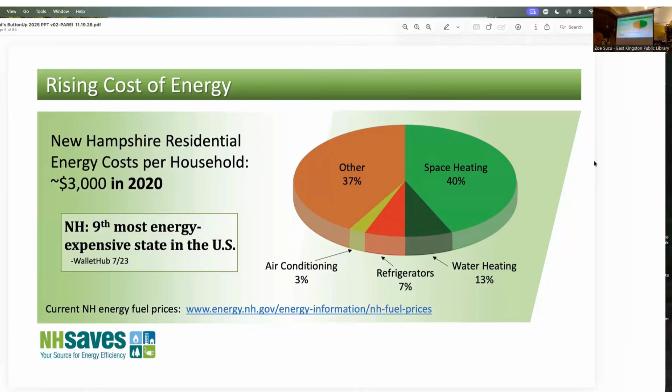We'll talk about electricity, because everyone's got an electric bill, unless you're off-grid or something. Most people just get their bill, grumble and moan, write the check or make the payment, and move on. But if you look at the bill, whether electronic or on paper, there's a little more information in there sometimes that you can look at - it might help you figure some things out.

There's usually a little graph that'll show you how you're doing month to month. I don't know if Unitil does this here, but some bills give you a little comparison to your neighbors - showing you how you're doing.

That thing is notoriously unreliable because they don't really know how many kids are in the house, how big or small the house is. They don't put that information in there. So sometimes that number, I wouldn't put too much credence in it.

But the average family or household uses about 20 kilowatt hours per day, which comes out to 600. It's helpful to know what's using the most energy in your house for electricity. If you have an electric water heater, that's going to be at the top for sure, that's the biggest thing. If you have some other way of making hot water, like propane or oil, then your refrigerator is probably the biggest one, which makes sense because A, it's big, and B, it's on all the time.

Your washer and dryer, and your entertainment center, you only use those a little bit each week. So no matter how efficient they are, they're not really going to make that much of a difference in your electric bill.

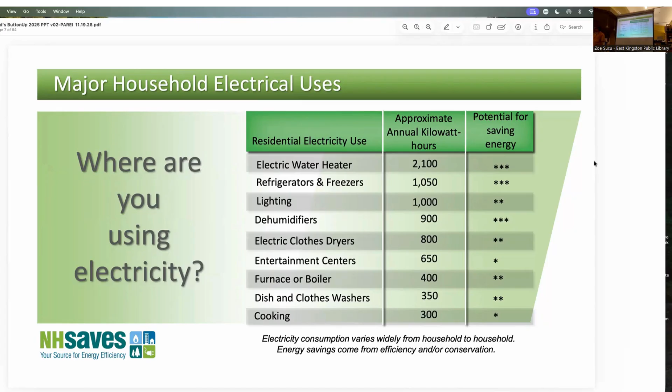If you're trying to figure out what something uses, the library here has a device called the Kill A Watt meter that you could borrow for a little while. You can take anything in your house, plug it in, do some math, and figure out like, oh, this TV or whatever costs me this much a month, whatever it is you want to figure out. You can figure out individual items, so that can be kind of helpful.

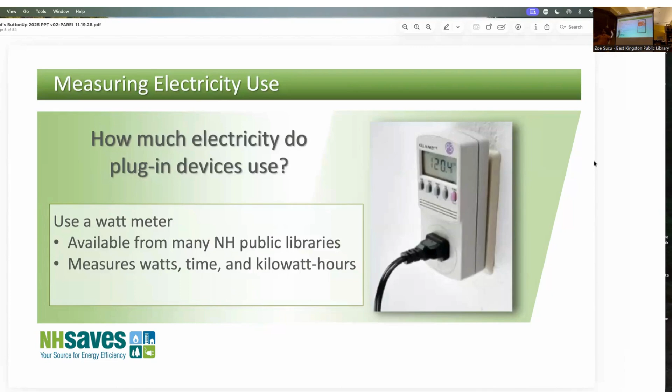You can take the next step, which is kind of a neat thing they've developed recently - whole house electric monitors. This would monitor every single thing in your house that's using electricity in real time. You could pull out your phone at work and say, oh look, my daughter just turned the microwave on and left the garage door open, and her light in her room she left on. You can see what's on and off, what's using power and how much. This can be really handy if you have a high electric bill but can't figure out what's going on.

There might be something hardwired in your house, like a well pump, that you can't plug into one of those little Kill A Watt meters. So this little device goes into your electric panel down in the basement, and it's smart enough to tell the difference between a vacuum cleaner, a TV, a hair dryer, a light, and things like that. It's kind of neat. Sometimes it has trouble figuring certain things out, and you can teach it - you can say, oh, that thing you think is a vacuum cleaner is actually the charger for the lawnmower, or whatever it is. You can actually label it and give it some names.

It says here electrician install - that's kind of a cover-your-own-behind thing I think we have on there. But technically speaking, I believe they're promoted and marketed towards homeowners to put in. You want to have a little bit of knowledge about electricity to do it, because you do have to open up your electric panel and do a little bit of work in there. They're a couple hundred dollars, but they can be really handy. There's a couple different brands - this screenshot here is from the one called Sense, that's one of the more popular ones that I've seen.

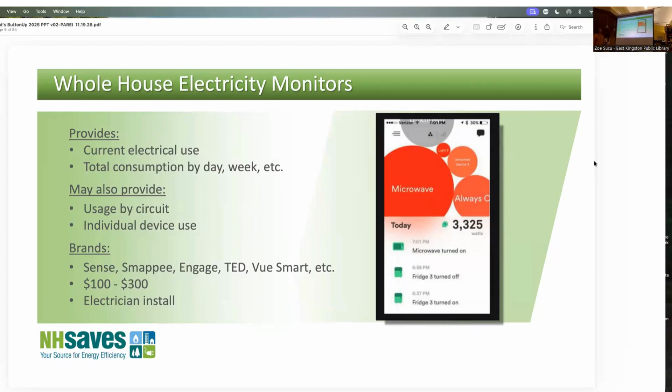This seems kind of stupid to put in a slideshow about saving energy, because everyone knows to turn things off when you're not using them. But you'd be surprised. Sometimes I'm getting hired by somebody to come to their house to do an energy audit to help them save on energy.

They go outside and they're weeding in the backyard or cutting the grass. And I'm going through the house and I hear something in a room, I knock, open it up, nobody's in there but the TV's on. Then I hear something else, open up, the stereo's on, or there's a space heater on. Then down in the basement there's a home gym, and there's a TV on down there. Wait a minute, we're trying to save energy but you got all this stuff on.

So I think over the years, a lot of us have developed some pretty bad habits. So there's some kind of behavioral modification that can happen sometimes to just help keep those things in control.

There are certain things in your house that are always using power. Anything with a black box, a charger, anything with a remote control like a TV, those are always using a little bit of electricity even when you're not using it. It's kind of tricky, because when I hit the off button on a TV, I think off means zero, but off doesn't mean zero. Off can mean like 20 or 30 watts. So for 22 and a half hours a day, that TV might be using 20 or 30 watts, just sitting there warmed up, ready for you to hit the remote control.

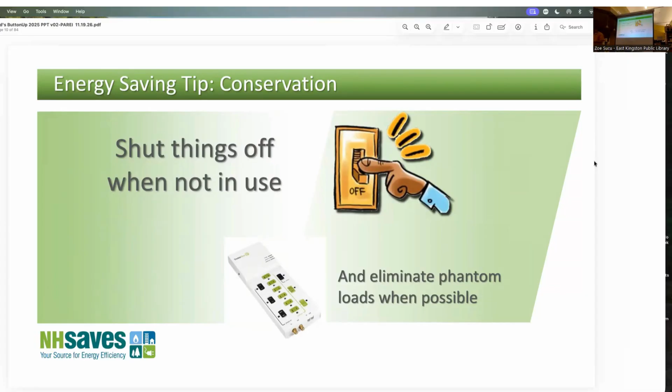As I mentioned, some of you guys might remember, these look like LEDs, but the lights they came up with years ago for energy efficiency were the CFL bulbs, the little swirly ones. They had mercury in them. They flickered. They took forever to come on full strength. They were terrible. I wish they never got invented, because they really gave a lot of people a bad feeling about energy efficiency lighting.

But LED bulbs now, like this one or the ones right here, don't have mercury in them. They come on right off the bat when you turn them on. They last a long time. They put out really good light, and they use a fraction of the energy that the bulb they're replacing usually uses.

Sometimes I'm in a house putting in, let's say somebody has 10 recessed lights in their kitchen. Each one of those old Edison style bulbs is about 75 or 100 watts, and I'm putting in a bulb that's only 9 or 10 watts. So all 10 of the new bulbs I put in don't even equal the energy of one of those bulbs I took out and threw in the trash. I wouldn't throw it in the trash if it was one of those CFL bulbs because that's mercury, so you got to recycle those.

The one thing I would caution you against is getting the ones labeled daylight. I know that sounds kind of weird because everyone loves daylight, right? Daylight's awesome, but the spectrum of light we call daylight in a room feels really kind of bluish. It feels like you're sitting in a dentist chair or something. So you really want one that is more like warm white or soft white, they call it. If you want to get scientific, look at the Kelvin number—something like 2,700 or 3,000, but not the ones that are like 5,000. That's what they call daylight.

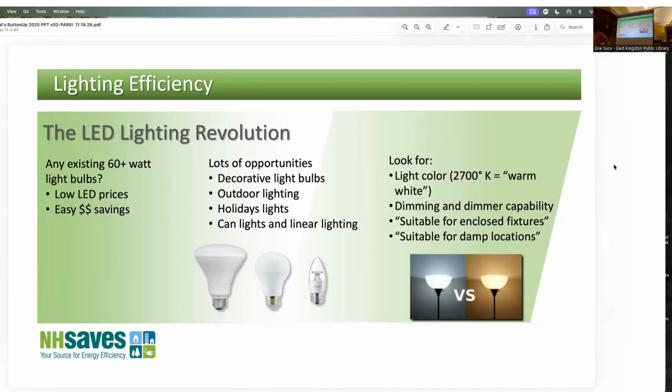I mean, they really have figured out all the things that people didn't like about the CFL bulbs, and they figured out how to make it better so people have nothing to complain about. They also last a long, long time for the most part. I've heard some stories from some people with some brands where they're having some issues with them, but for the most part, they do last a long time.

Again, another really easy thing you can do is throw in a low flow shower head. Some people worry that it's going to be just a little dribble of water coming out. Most people that I work with, when we put these in, they're like, wow, that thing is awesome. It feels like there's more water coming out now than there was before, because it's coming out at a higher pressure. So it usually isn't a big deal to have a low flow shower head, and every time you take a shower, you're going to be saving energy.

This pipe wrap you can get at the hardware store. It's really cheap, really easy to put on. So if you have exposed pipes in your basement, or up in a knee wall space or something, you can insulate them. That's a really cost-effective, good do-it-yourself kind of thing.

Turning down your hot water is a good one for a lot of people. It doesn't need to be like 150 degrees, where it's steaming. That's a scalding risk, it's really dangerous, and it's a waste of energy. So 120 is really all you need.

And the last thing you can do is be like me and wash all your clothes in cold water. This shirt is like 20-something years old, and I don't think it's ever been in hot or warm water. I have some clothes that I do wash in warm water, like if I'm out in the yard getting dirty, I kind of have to use a hot water cycle. But I found that most of my clothes come out fine just washing them with cold water. You don't really need the hot water.

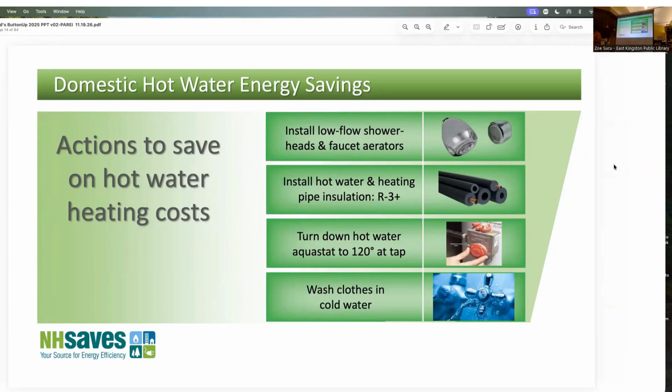Again, other simple things: you can make sure your dehumidifier is a good one, a modern one, not from like 1972. Make sure it's set at a good humidity that you want.

I think you can still dry your clothes outside in Kingston. Is that true? They haven't passed a law yet or anything, right? Because I did one of these over in Hampton, I think, last fall, and there was a gentleman who came up from Massachusetts to the thing. He said, 'Yeah, my town in Massachusetts just passed a law that says you can't have a clothesline.' He said so all the townspeople are up in arms and they're all going to fight it. I've heard that there are some condos that do that too, condos that have a rule against clotheslines. But that's free energy from the sun.

So we're certainly not going to tell you to go out and get rid of all your appliances and go get Energy Star appliances, because that would be pretty bad for the planet if we all did that. But if you do have something like a washer or dryer that's getting near the end of its life, or if it dies, that's when you should look for that Energy Star label, because that will save you some money in the long run.

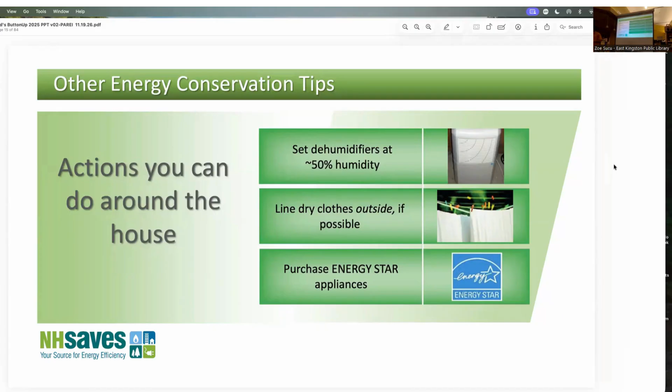They've got a lot of different rebates for Energy Star. You can get them for washers and dryers, and even little room purifiers and stuff now. The most popular one is the refrigerator one, because refrigerators use a lot of energy, and they're kind of hard to get rid of sometimes. Sometimes the transfer stations won't even take them, or they charge you. So in this program, they'll actually sometimes take your old one away for free. So that's something you can look into.

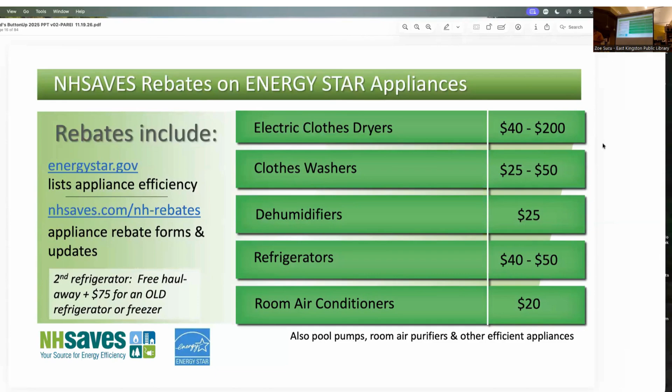All right, let's move on from electricity to staying warm in your home, because that's kind of what we've all been doing for the last 4 or 5 months. Probably got another month to go of doing that. Maybe even more, but it's going to be like last year.

So again, starting with the real basic things, what can you do to save energy on your heat? First of all, you could turn your heat down when you're not in the house for an extended period of time, 4, 5, 6, 7, 8 hours. If you're just going down to the store to get some milk, don't bother turning your heat down, it's not going to do anything, it doesn't make sense. But if you have a propane or oil system and you're going to bed or going to work for 8 hours, it will definitely save you money to turn it down, whatever, 3, 4, 5, 10 degrees, whatever you can get away with.

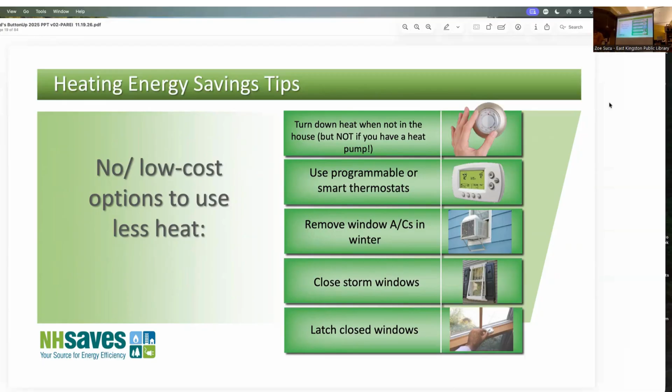All right, we'll get into some deeper things now. You might think back to some stuff you learned in a physics class somewhere along the line, but hot always goes to cold. That's one of the basic laws of physics. It always goes to the coldest thing it can go to.

We cannot stop it. All we can do is slow it down as best we can. We haven't figured out a way of actually stopping that kind of heat loss. So when you turned your heat on in September or October, you've been heating it all winter long. The house is warmer than the outside, so heat is always trying to escape, going toward the cold. If it's a hot day, like a 90-degree day, this won't be happening. But if it's anything colder than your house, that's the direction the heat's going to go in. So it's kind of important to remember.

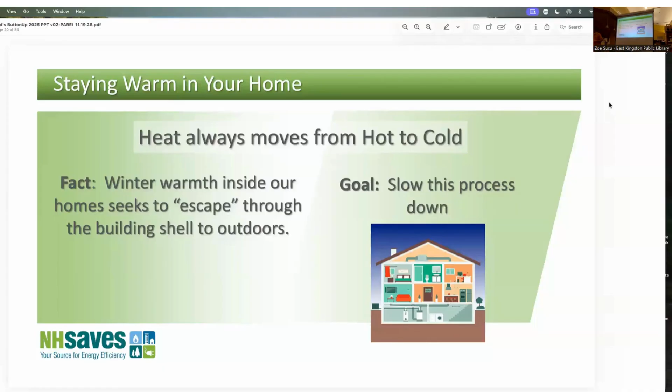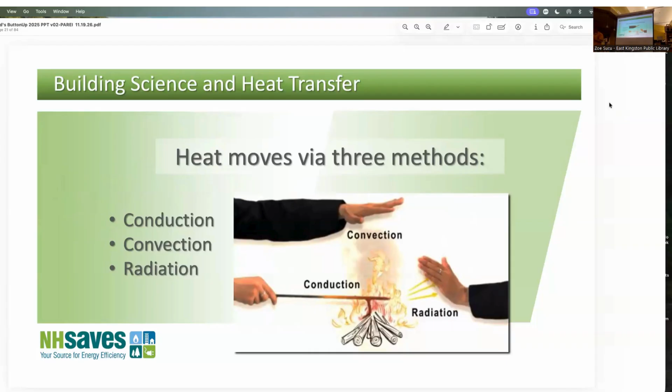You might remember these words from a science class - this is the way that heat moves: conduction, convection, radiation. There's a few other more obscure ones which we won't even mention. We're really not going to talk about radiation at all either. We're going to talk about the other two, because those are the ones in a building that actually really kind of drive your bills up.

So the first one is conduction, and conduction is when heat goes through a solid surface. This person here is going to wish they had a glove on in a second, because they're holding like a metal poker into a fire. The heat is going to go right through that metal into their hand, and they're going to drop it.

So we know certain things are not very good at conducting heat, and we call those insulation or insulators, and that's a good thing. There are some applications, like in a computer system or a spaceship or a car, where you might want something that's a really good conductor and sends heat very quickly. But in our houses, we want things that don't transfer heat very quickly. That's what we're looking for.

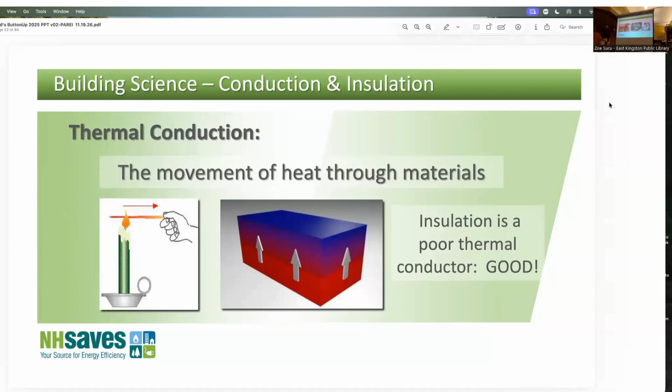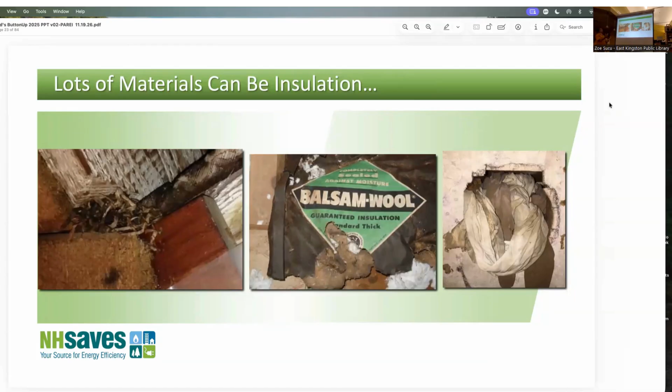So obviously this stuff, not a very modern thing and not very good. Oh, here's another wild one I saw recently - bedspreads and comforters and chaise lounge cushions and stuff. I suppose it's helping a little bit, but the mice certainly loved it. This lady swore that it wasn't hers, and I believe her because she had just bought the house a few years before that, so they've been there for a long time. She didn't know those were up there. I went up there and took some pictures, and I came out. She's like, 'How's it look up there?' I'm like, let me show you.

You're not going to believe this.

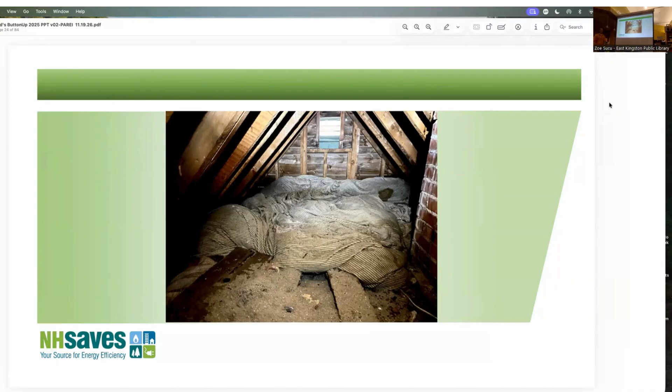So yeah, we don't want to use stuff like that. We have a lot of different things we use when we insulate houses. We rate these materials with what's called R value - the higher the R value, the better. That's how good the material is at slowing down heat flow. One of the more famous ones you probably see around is fiberglass. This happens to be pink fiberglass, but it comes in other colors, and that's about 3.5 per inch.

So depending on how thick it was, that would be your R value. Another product that gets used a lot is blown cellulose, which is this right here. I got it in a bag just because it makes a mess. It's kind of light and fluffy. It's actually made out of recycled newsprint and newspapers and things like that. If you look closely at it, you can actually see some glitter sometimes. Really, really good product - it's got about the same R value as fiberglass, but it has a bunch of other really good qualities that fiberglass doesn't have. So this is actually, I think, in most ways, much better.

And then you get into some things that have more R value, like this rigid foam board here. This has an R value of like 6 or 7 per inch, and this is 2 inches thick, so that would be about 12.

Similar product to this would be spray foam. This comes in a 4x8 sheet, and you cut it up and put it in places. Spray foam actually comes out of like a truck with big barrels of chemicals, and they put it together and spray it on the wall, and then it puffs out. It's got this texture to it. That has a really good R value too, like R6 or R7. It's also a lot more expensive though, so it's not like this is better than that stuff just because it's got a higher R value. There's a certain time and place where you might want to use some of these materials.

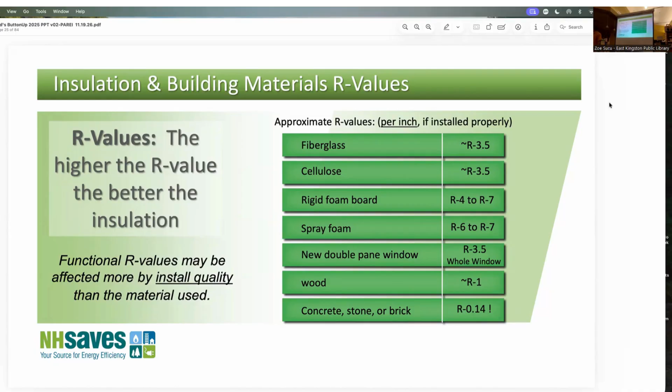In terms of R values and what the building code says, the average house in New Hampshire is kind of over here.

The average attic is supposed to be R10 to R30, but I was in a house in Newfields last week that was R1. It had drywall or plaster and lath, so I give that a little bit of credit, but above that there was no insulation at all, none, which brings the average down quite a bit to about R1.

By code in New Hampshire, at least on paper, if you go to this website it tells you what R values you're supposed to have in your attic, walls, and basement. So the average house in New Hampshire is not even close to where it should be, and I'm talking about older houses, but also newer houses, and in some cases even new houses.

The New Hampshire energy code, when were those numbers put in? We're kind of behind. Some states say they'll adopt the next energy or building code whenever it comes out, and they change it about every 3 years. In New Hampshire, we're hesitant to automatically follow what other states are doing, so we're typically at least 5 or 6 years behind. Last time I checked, I think we may still be following the 2018 building code, maybe 2021, and it's already '26, so we're like 4 or 5 years behind. We also don't adopt everything in the new building code - we pick and choose what we want to follow and make exceptions for certain things.

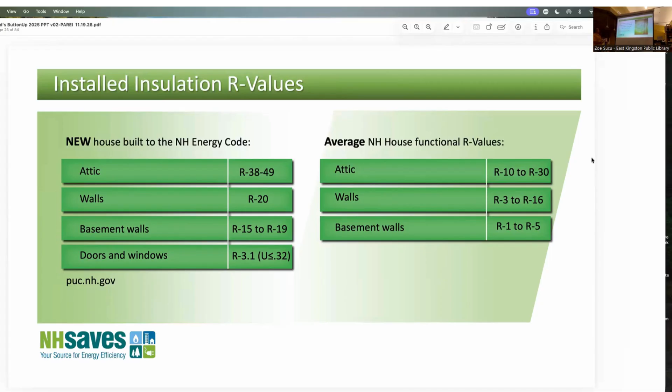Install quality matters. This is a picture of an attic with R38 insulation, which is a good level - not quite up to code, but a lot better than most houses. But you can see spots here where there's exposed wood, bare drywall, bare sheetrock. When you figure out the average R value of that attic, it's actually down to like R15 or 20, not 38. So even though it says R38 on the back of the insulation, the heat loss coming from these gaps is so rapid that it works against what the rest of the insulation is trying to do. Install quality is really, really important.

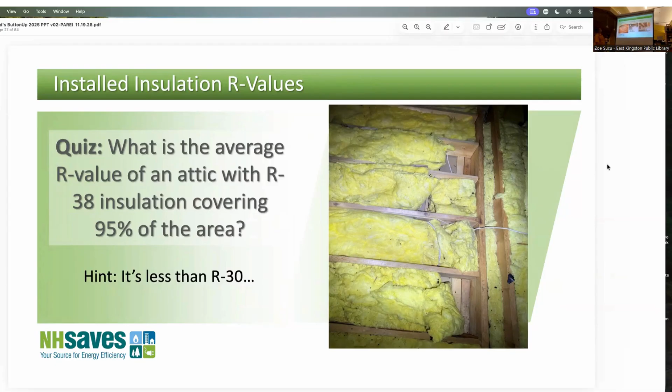There are a lot of different ways insulation can get messed up. First, you could just not have enough of it. This is blown fiberglass - these look like 2x6 joists sticking up 2 or 3 inches, meaning there's only 2 or 3 inches of insulation, when the tops of these floor joists should really be buried in about a foot of insulation. Sometimes you have spots that are really high and spots that are really low - there's a lot of variation - and sometimes you just have missing insulation entirely.

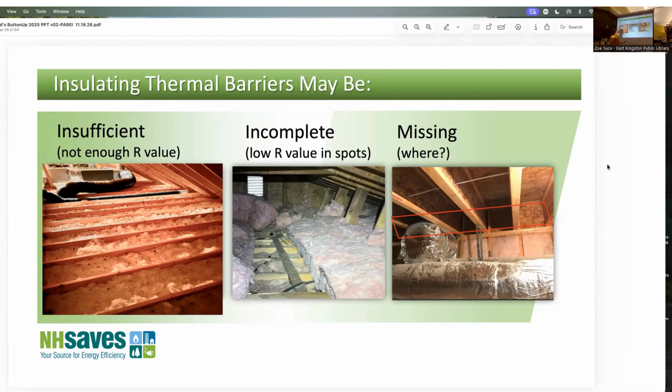This was the back of a wall at a place I was looking at in Nashua - a really ultra-modern new building. For some reason, when they built it they put this pre-painted insulation in the wall, but they didn't realize that behind this section was actually the outdoors, not the living room. So they needed insulation there, but it had none. You can only see 3 or 4 bays here, but this went on for about 50 feet - an area probably 2 feet high by 50 feet long with no insulation at all. The heat loss in that little strip was phenomenal. At that point, who cares what's in the rest of the wall - if you have empty spots, it doesn't really do anything.

A little bit less common, but still out there a lot—I saw it a couple times this week—is what we call misaligned insulation. That means the insulation is not lined up right, it's not in the right place.

This is a situation where somebody decided, instead of insulating the floor of their attic, to insulate the slopes, the slanted part. Sometimes that's actually a good idea, but not in this situation because there's daylight coming through there, there's a fan, it's open to the outdoors. It's like insulating these walls really well, then leaving the windows open all winter—it doesn't really do much. This is kind of like having a window open, right?

I mentioned people kicking the roll of fiberglass. This is somebody where it goes up and down, and underneath there's some wood, so there's a big cold spot underneath because there's all this space under there. This is not really going to work very well right here.

This is a situation where I went up through this little hatch and looked around in the attic, and there's insulation in the slope, which means I am technically inside the house—it's cold on the other side of that slope and it should be warm where I am. But then I turn around and there's insulation in the walls too, facing the bedrooms. So it's like, you don't want it in both places—it needs to be one place or the other, not both. Somebody just was confused about this when they put it in, and you could tell it was probably two different people at two different times. They just didn't really get the whole concept of having one good thermal barrier.

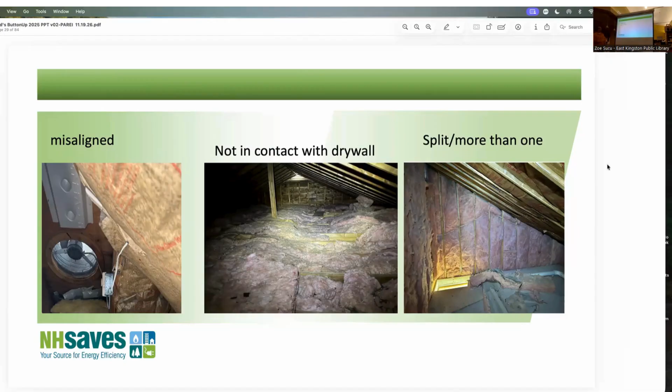All right, so that's conduction. Let's move on to convection and ask this question: heat rises—how many people have heard that before? Guess what? It's not true. It's false. Heat does not rise.

Where does heat go? We just talked about it—it goes to cold, right? So it doesn't matter if the cold is up, down, left, right, north, south, diagonal, whatever. Heat is always going to go through whatever solid surface it needs to get to the cold thing. It's a little bit of a trick question because there are situations where it appears heat is rising, but the heat is actually not rising. What you're looking at is the hot air, and the hot air rises—that's a little bit different. It sounds like I'm splitting hairs and being a little silly with it, but it actually does make a difference.

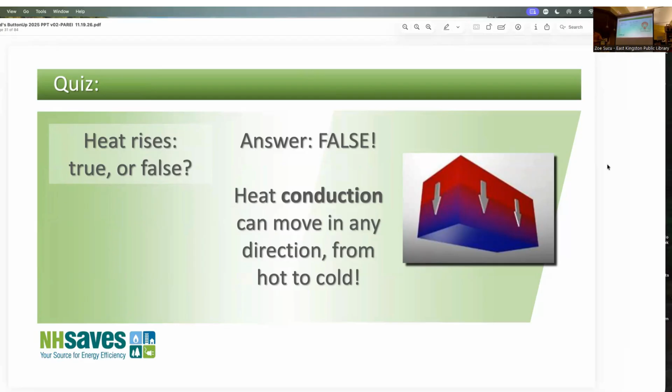That's the reason why hot air balloons work, right? In a hot air balloon, they have a big gas thing that fires up and makes a bunch of heat, and the heat makes the air hot, and hot air does rise. So the hot air rises up and hits the top of the balloon, and as long as there's no rips or holes up there, it'll actually lift that balloon off the ground.

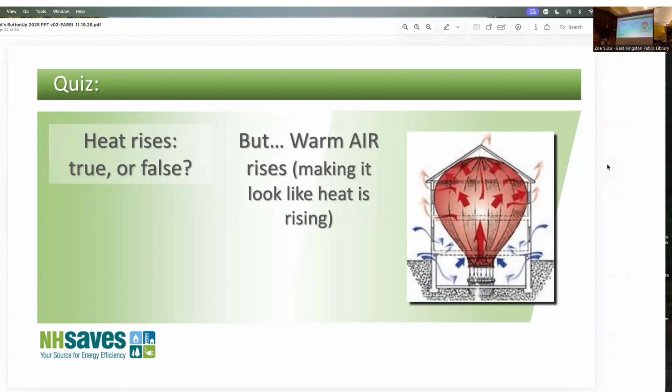So warm air will rise, but again it's not really heat that's rising, it's warm air. This comes into play in a house in really interesting ways. As soon as you start heating your house, the warm air rises and gets to the top, and it virtually never just stops there—it keeps going, finding places to get out and escape. But I'm sure no one has ever complained that they ran out of air in their house, because all the air that escapes gets replaced by other air down here. The cold air comes in for free down low to replace all the hot air going out at the top. You can notice the same thing.

Does anyone here have a wood stove in their house?

If you have a wood stove on one wall and windows on another, the wood stove heats up the air, and wood stoves work really well. The hot air rises and gets nice and warm near the window. But windows are only about R3, so they're cold, and the air cools off and drops because cold air is dense and sinks. It comes back over, warms up again, and rises. So you can actually get a convective loop going in a room.

We call this the stack effect. It's stronger the higher the building is. If you have a little ranch house, it'll happen a little. A 2-story house, a bit more. A 3-story house, even more. The taller the building, the more this is accentuated. It also gets a lot worse the colder it gets. During one stretch when it was like -10 degrees, you felt a lot of cold air coming into your house. You didn't really feel the hot air leaving, but it was still happening.

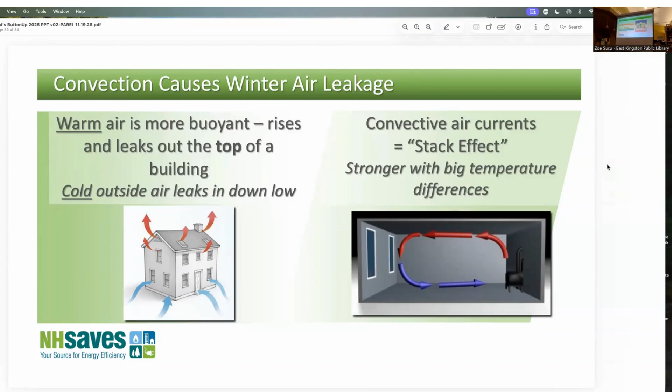Knowing this is where those ABCs come in. If the hot air is going to leak out at the top, that air is expensive because you paid to heat it up. You want it to stick around, not leave. So it's really important that the first priority be the attic, or the top of your house if you don't have an attic. You really want to make sure you're keeping that air in.

The lowest spot in the house is going to be where most of the cold air is coming in, so that's your second priority. Counterintuitively, your last priority is the center, which is where everyone lives. Most people don't live in the attic or the basement; they live in the center. So it goes against what a lot of people think—they worry about the center, but they really need to worry about the attic and the basement.

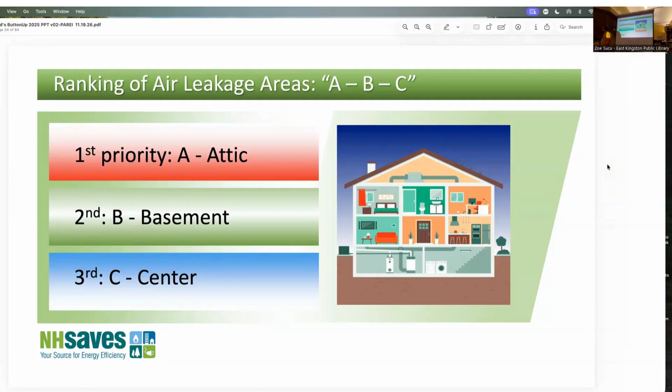So where do you find the leaks? If you're brave enough, you can go up in your attic and look for them. I'd recommend a good dust mask, better than this one, and a good headlamp. You don't need a hard hat, but be careful, because in a lot of homes there are nails coming through the roof. You don't want to hit your head on one. You also have to be careful where you step, because if you step in the wrong place, you might put your foot right through your ceiling. So if you're going up there, be careful.

Chances are you have something like pink fiberglass insulation over your lights or your bath fan. If you lift that up and look, you'll see it's all black and stained—usually not mold, just pollen and dust from the last 10, 20, maybe 100 years. Air has been sneaking up through that light fixture for that long, and the pollen and dust get trapped in it. It's almost like a cigarette butt—if you look at the end of one, it's all dark. It's the same thing.

Electricians have to poke holes into everything to run their wires, and if you pull the insulation away, you'll see dark staining around those holes. It's only a little bit, but it's happening 24 hours a day, 7 days a week, from September all the way into May. There's usually a pipe like this for sewer gases, and if you pull that away, you'll see the dark staining too. If you have a chimney going through the middle of your house, you could probably drop a penny down through that hole and it would go all the way to your basement.

Now that's got a gap there for fire code reasons. You're not supposed to have anything flammable right up against that chimney, but there are ways of sealing that up so that you're not constantly losing hot air.

Even the tops of walls, even in a modern building, actually leak. If you move the insulation off the top, this is like a 2x4 top plate. Let's say this is the drywall in the bedroom and this is the drywall in the hallway. You can actually see there's like 2 little black lines here, right where that little crack is, because air is getting into the wall.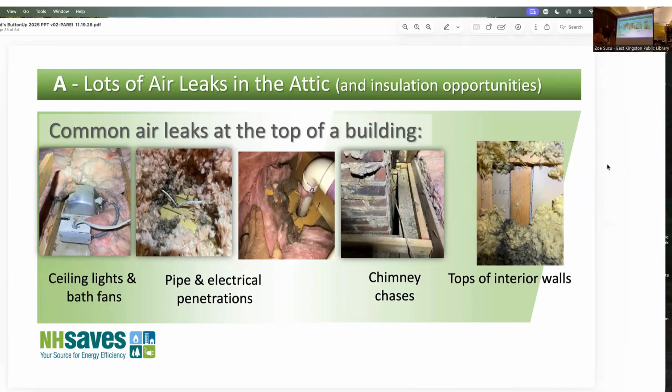So now that you know a little bit about that, what do you think of this attic hatch I saw one day? This is made out of pegboard. Does anyone have pegboard in their garage? Usually pegboard is in your garage and you got hooks and you move the hooks around. Good idea or bad idea? Bad idea, yeah.

Even if you put 16 inches of insulation on top of it, that's a good R value, but if you left it there long enough and lifted up the insulation, you'd see all these little dark marks next to every single one of these holes, because air is just going out through there.

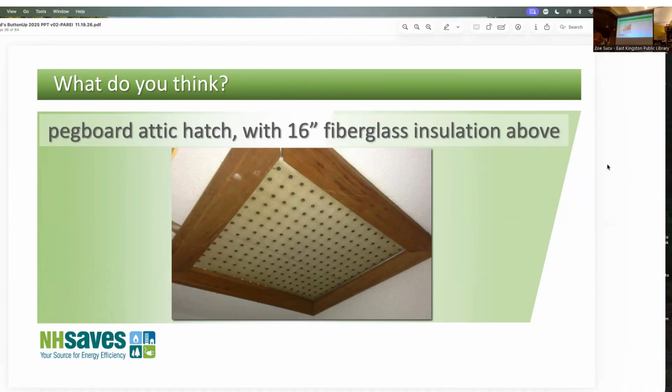Another really good reason to make sure that the warm air in your house stays in your house where it should be is that if that gets up into the attic, the relative humidity of that air is going to change because the temperature is going to change. So it might be really dry air in your house, maybe only 30 to 40 percent relative humidity. But if it gets in the attic, it's going to drop to whatever, 30 or 40 or 50 degrees, and then the relative humidity is going to jack up really, really high. And then you could get a situation like this.

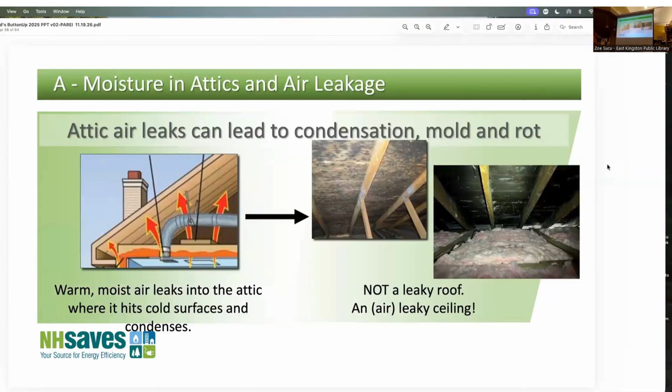So that's not from a roof leak or anything like that. It's really just because there's so much air from the house getting in the attic that it's condensing here. When I see this, I actually can't tell the person it's mold because I'm not a mold expert, so I usually say it looks like some kind of microbial growth or something that ServPro or somebody should come in and check out and test.

But sometimes I go into attics in the wintertime and instead of being black like that, it's white, and I touch it and it's cold. I'm like, oh, I can tell the homeowner that's frost. I don't need to take a class or get a certification to know what frost is. Sometimes the whole underside of the roof, sometimes the nail heads, are all frosty, but sometimes it's just the whole thing, it's just all frosty.

So that's a really bad thing long term, for the people in the house and also for the house itself. We have a question from someone online.

If heat and air conditioning is supplied through ductwork, is this an ineffective way of heating?

No, it's not necessarily automatically an ineffective way. We have a slide coming up about ducts, but basically ducts should be sealed and they should be insulated, especially if they're not inside the house, if they're in the attic or the knee wall spaces. So it's not necessarily a bad way to heat your home, but it does come with sort of a special set of potential problems or issues.

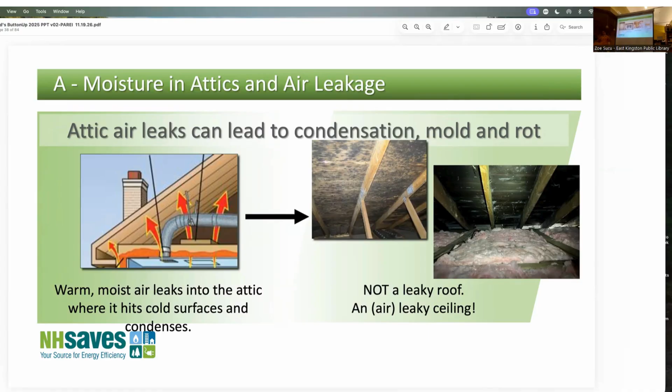So now that you've done the attic, you go down to the basement. You skip the second floor, you skip the first floor, you don't worry about that stuff at all. You go all the way down to the basement and you look for things like light coming around your door, or hopefully you have a door. I mean, I'm in homes sometimes where there isn't a door, it's just an opening going to like a bulkhead.

You have windows. Sometimes people have little squares of fiberglass up here in what we call the rim joist or the box sill. If you pull that away, sometimes you'll see this black line. It's exactly what we just talked about in the attic, it's just the opposite. So that's cold air coming in from the outdoors to the basement, and it's going through that insulation and leaving these telltale dark marks. It's dust, pollen, and stuff in the air.

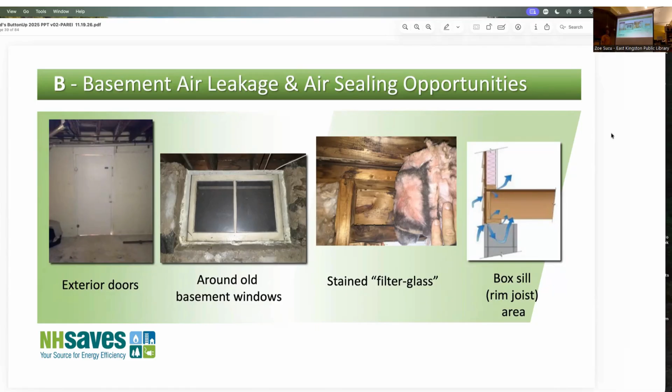So these are all places down low where the cold air is coming in. As I mentioned, the center sometimes has some opportunities, like around your doors, if you have old pulley hung windows, or a fireplace with a flue where the damper doesn't work. There's some stuff you can do there sometimes, but I wouldn't lose sleep over this stuff, and I wouldn't put an ounce of effort into it until you do the attic and the basement.

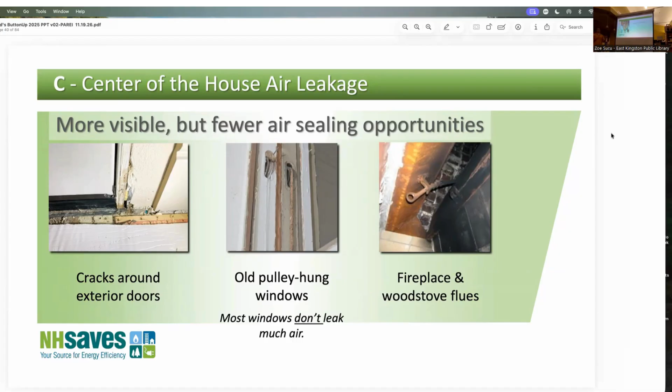Occasionally, though, you do find places that have really big issues in the middle, in the center. This is actually a condo that we looked at in Dover. When I first got there, this was covered by some white vinyl plasticky stuff, basically like siding, sort of like this siding, but it wasn't tan. And when I pulled it down and looked up, there was no sheathing.

Sheathing is like wood that's on the outside of a house. Like here there is, but here there isn't. I don't know why. And the next unit over, when I pulled that down, was actually solid plywood behind there. I guess when they built it back in the 80s, they had different crews of people doing each condo, and the people that built this condo figured, well, technically that's not a wall, so we don't need to actually put any plywood over it. We'll just stuff some insulation up there.

You can see how dark that insulation is because air has been getting sucked up in there, and then it runs along between the first floor and the second floor. So sometimes you have some really weird things going on in the middle of the house, but that's a little bit more rare.

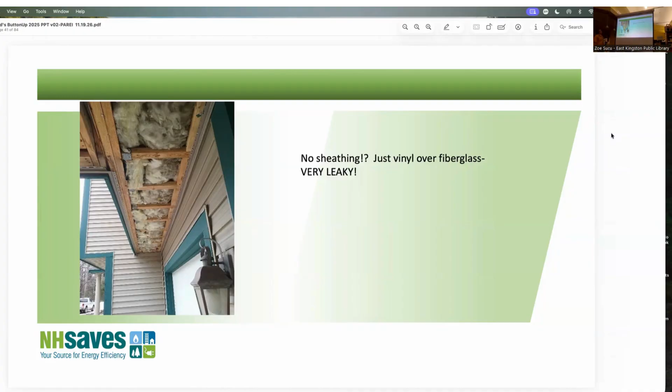And the reality is, almost every house in New Hampshire is way leakier than it could be or should be. So you could tighten up that house so the warm air stays in and the cold air stays out, and you can save a lot on your energy bills, but you don't have to worry about having really bad indoor air quality problems because of all these leaks.

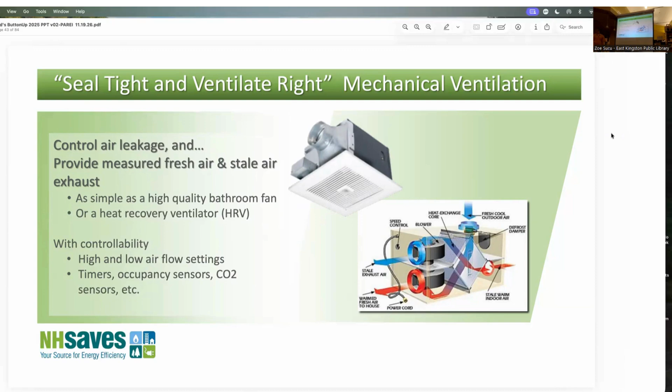Because this house back here, with all these leaks everywhere, the air is just filtering in through the walls and the fiberglass and the mouse poop in the walls and stuff. Who knows what's going on in there? And then you're like, that's not clean air. But if you have a system like this, it's got dedicated ducts that go to the outdoors, so it's actually getting really good air. So there's been a pretty big change in building practices.

I'll talk about bath fan venting because it's so terrible. You never want to use this white, cheap, plastic, flimsy stuff. I'm not a big fan of banning products, but this one I'd make an exception for. This product should be banned, there's no good reason for it at all, because it gets shredded up by the heat and the cold, it tears.

So you should have a bath fan, and it should be going all the way to the outdoors. It shouldn't just be dumping right into the attic, and it shouldn't just be going out to the soffit, hoping the air makes it all the way out there. That's just not going to happen. You really want to use a high quality rigid flex duct made out of metal, and make sure it gets all the way to the outside.

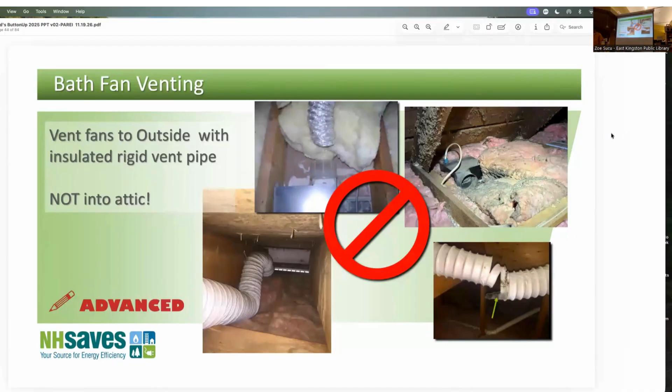Again, thinking about that indoor air quality problem, the main thing is to step back and think about what's going on in your house that could cause bad indoor air quality. You're not going to throw out all your plants, kick your kids out, give your pets to your neighbors, or stop cooking. We need to live our lives in our houses.

But the thing is to realize that things you're doing in your house, like taking a 30-minute shower without a bath fan, is going to produce a lot of moisture. Moisture isn't that good when it gets that high.

You would not want to go into the attic and start sealing up that house, because that problem is not going to get better, it's going to get worse. It's going to make really bad issues for the people in that house. So you have to be a little careful with this.

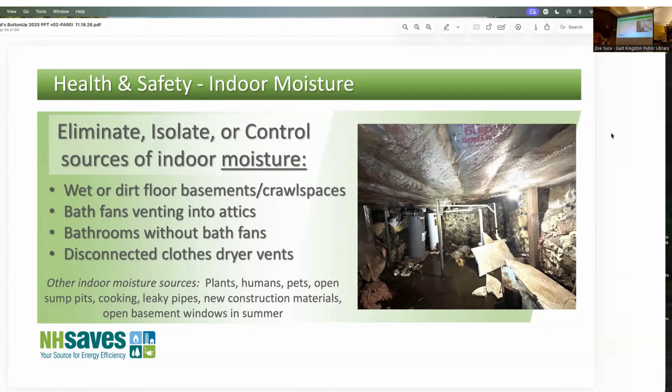Alright, this isn't anyone's house here, is it? Alright, good. Because a couple of years ago in Portsmouth, when I was doing this—by the way, thank you for showing up tonight, really good attendance—a couple of years ago I was in Portsmouth and only 2 people showed up. I was thinking it would be jam-packed because of all the people and money there and all the old homes. I think there was something else going on that night, a local event or something. But anyway, as I was doing my slideshow, the lady in the back was like, 'Hey, that's my house.' I had a picture of her house in my slideshow. I was like, 'Oh, what are the odds of that?'

So these are really bad ice dams. You may have this going on in your house. This year was particularly bad for ice dams. What do you think is going on in these houses based on what we just talked about? It could be one thing, it could be another thing, or it could be both together. What's the first thing it could be?

Too much heat loss, like not enough insulation, right? So it could be heat loss—maybe there's only 2 inches of insulation on the floor there, maybe 4 or 6. But what if I told you they went crazy and put 2 feet of insulation in, that's more than you need, and it still looks like that?

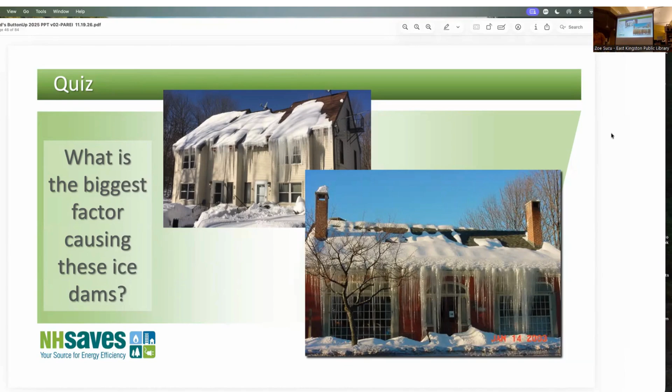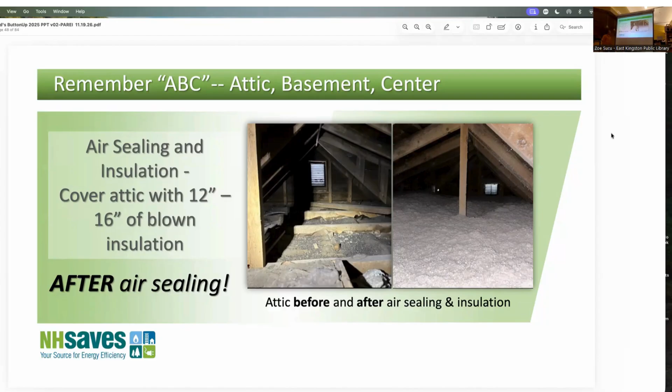So again, going back to those ABCs, attic is the place you start with. You want to make sure your attic is fully insulated like this, not like this. It's pretty important that you air seal first, because if you put all the insulation in at that point, it's pretty hard to find all the places where they're leaking. It's a lot easier to do that when it looks like this. Then you can insulate. So air seal first, then insulate, and start in the attic.

Then you go to the basement. Oh, talking about air sealing, what does the air sealing look like? Around a chimney, that has to be done really specifically because it's a chimney, so this is actually metal. That's fire caulk. This is just what's called a can cover.

It's almost like a chef's hat that goes over a recessed light, and you can foam that in with this kind of gooey foam. But you really don't want to use this kind of stuff over here because that violates the fire code and things. That's a special situation where they did a big skim coat of spray foam because it was just so leaky that it was easier to do that across the whole thing.

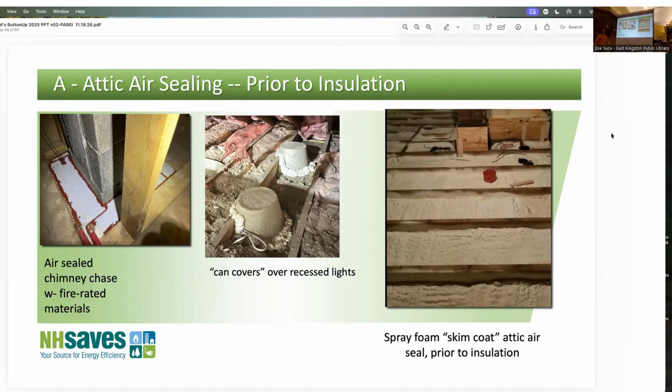If you have a drop-down stair, when you pull the drop-down stairs down, you should not be able to look right up into your attic. There should be a really nice insulated cover. You can see this one's got some really good weather stripping around there. It's actually more important that this is weather stripped better than the front door, because the front door is actually going to be less leaky than this is. This is the highest thing in the house, so there should be an insulated cover like this.

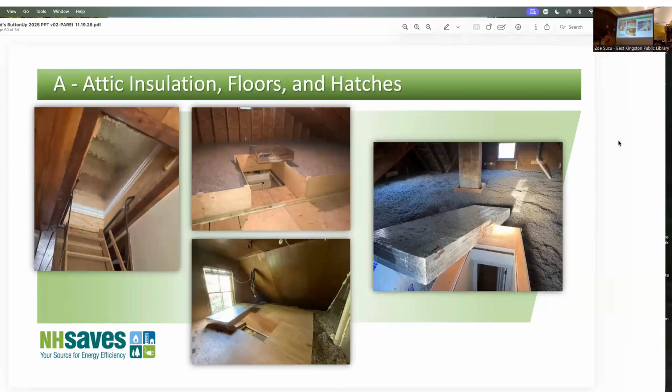This is made out of that rigid foam board I showed you. We stack up 3 or 4 layers of this 2-inch stuff to make a cover over it. If you have to store stuff in your attic, there are ways of making storage, but it costs a lot of extra money. I usually try to get people to get rid of their stuff, put it somewhere else, and then we can just put a barrier around the little access, and insulate the whole entire attic and get it really protected. These are professional installations, but if you're really handy, you could probably pull something like this off yourself.

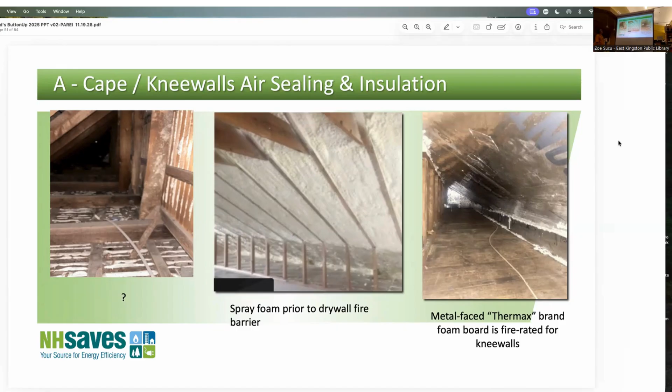If you live in a cape, you know there's that little triangular knee wall space in the front or back, or sometimes both. This is a house I was in recently in Portsmouth—this is the back of the knee wall, and that's the floor, plaster and lath, with no insulation whatsoever. Sometimes that gets done with spray foam, sometimes with rigid foam board. In this case we did the slope; sometimes it's better to do the wall and the floor, so it can be tricky figuring out where the best place to do this work is. These are just different examples of things you can do.

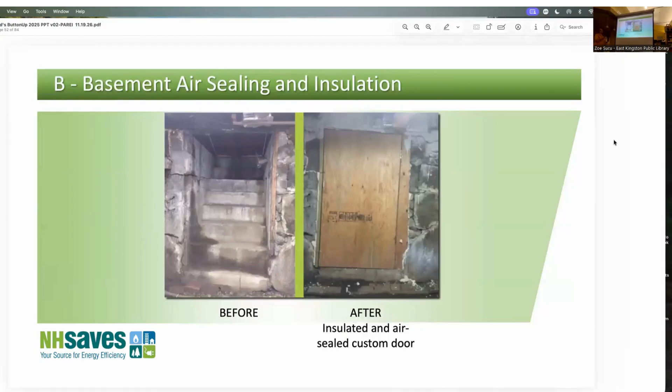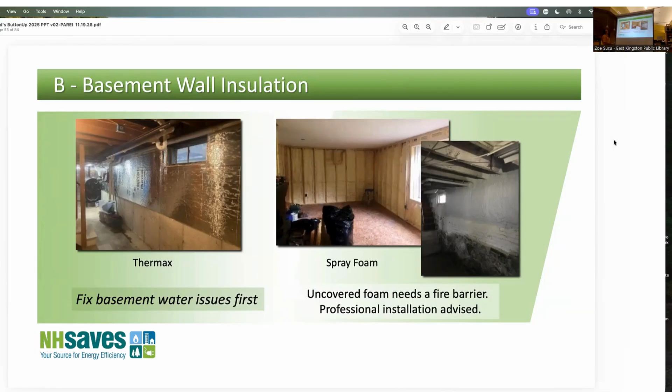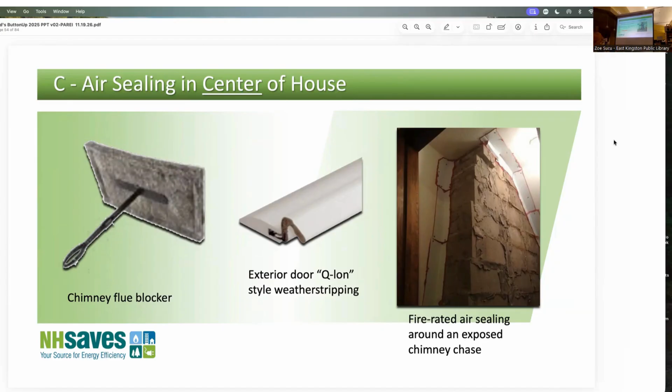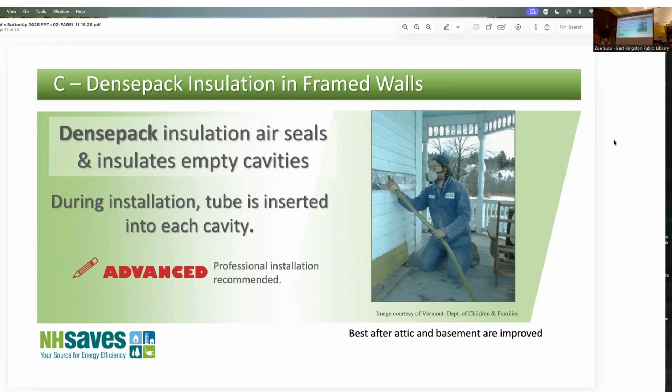If you have an older house with empty walls, they shouldn't be empty—they should be full. This is something you definitely don't want to try yourself, because the machinery you'd get at the hardware store isn't made for this kind of thing. It's pretty tricky: you have to take siding off, drill holes, feed the material up, and it takes quite a bit of skill. So I'd definitely recommend getting some professional help if that's something you want done.

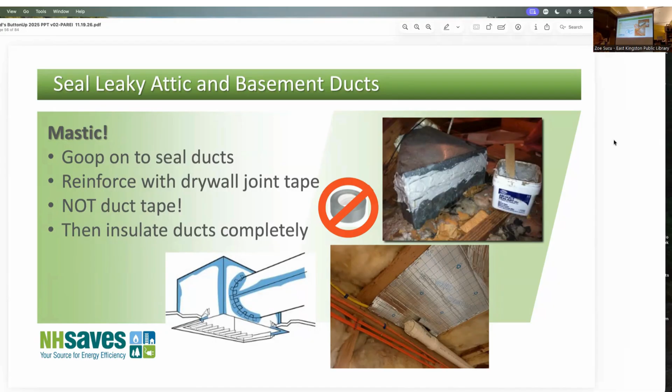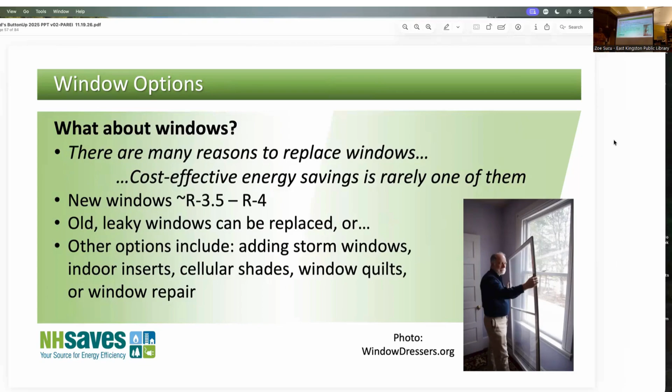All right, so hopefully this is kind of what most people are like at this point in their head. So let's talk about getting help on this stuff.

One of the things you might want to do is get an energy audit done - that's what I do, my day job is doing energy audits for people. It's never just going up into someone's attic, getting a measurement - oh, it's 800 square feet, you need this much, blah, blah, blah. It's way more than that. We go down into the crawl spaces, we get into the knee wall spaces, we do a bunch of safety testing on your hot water system, your heaters, your furnace, your boiler. At the end, you get a written report with all the findings - here's where the deficiencies are, here's where improvements can be made, possibly even what it would cost to do it, here's a couple different ways of doing it.

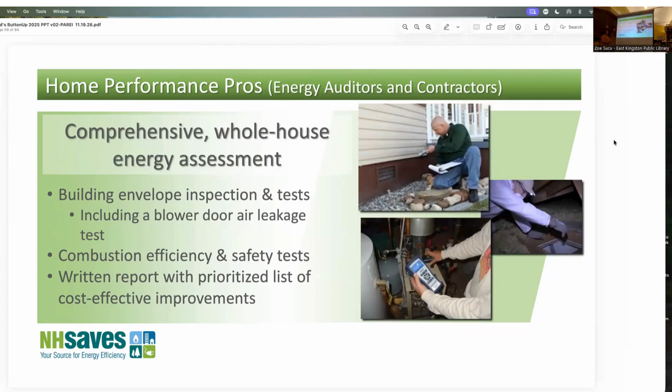So it's a really good thing to get done to your house. Again, in New Hampshire, anybody could say, I'm an energy auditor. There's no state guidance or licensing or certification. So it's up to you to do some homework and get someone who is certified and experienced and knows what they're doing. So you want to look for some certifications.

BPI is sort of the biggest one nationally. There are some other ones, like RESNET, there's other ones, but you're going to want to probably ask them about, do they use a blower door, which we'll talk about here in a minute.

If you're trying to find people that are qualified to do this, you can contact REPA, a nonprofit group that has people who are qualified and trained and certified in it. You could also contact NHSaves. Even if you don't qualify for the program we're going to talk about in a few minutes, you could call them and say, look, I didn't qualify, but can you give me the list of people you guys use? And they'll send you a list of contractors that they use in the program, because they only use people who are BPI certified and vetted and approved.

So it's kind of important that you do that, because there are a bunch of sort of Tom, Dick, and Harry fly-by-night outfits that say, yeah, we do, but they don't have to know what they're doing, I guess is what I'm saying.

One of the things that you might get done if you get an audit is a blower door test. A blower door test is basically like a big fan that we set up in the doorway, and then you close all the windows and doors and you crank up the fan and you blow air out through the fan. So what it does is it pulls air in through gaps and cracks and holes and things, and it sends it out through the fan.

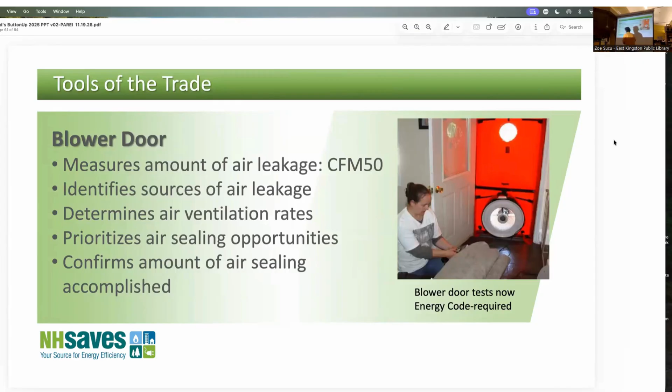Speaking of energy codes and blower door tests, believe it or not, this house here—I'm sure this isn't anyone's house here because this house is not around here, but that's like Winnipesaukee back there—this is one of the worst houses I've ever been in. And I've been in a lot of houses, houses from like 1740. This house is worse than the house from 1740, believe it or not.

Absolutely horrible. And the big, major, huge issue with this house would have been found immediately if they had just run a blower door test after they built it. But the town here doesn't require it, so they just built the house. And these people had ice dams that were so bad, it was like that picture I showed you before.

So when I went there in the wintertime, not like this nice summer weather. They had buckets and Tupperware containers in their living room because water was coming in through the shingles - ice dams were backing up the water, and it's terrible stuff.

This was kind of a funny situation I had where I ran that blower door test - I told you how it works, it sucks in so it blows out - and we heard a big bang upstairs after I turned it on. The homeowner's like, 'What was that big bang?'

I was like, 'Oh, that's probably just your dog running around, your cat.' She's like, 'No, I don't have any pets.' I was like, 'Oh yeah, you're right. Shoot. Well, it might have just been a door because it'll actually open and shut a door if there's enough air coming through.' Well, we went upstairs and all the doors were still open. So I was like, 'Yeah, that is kind of weird. What was that big bang?'

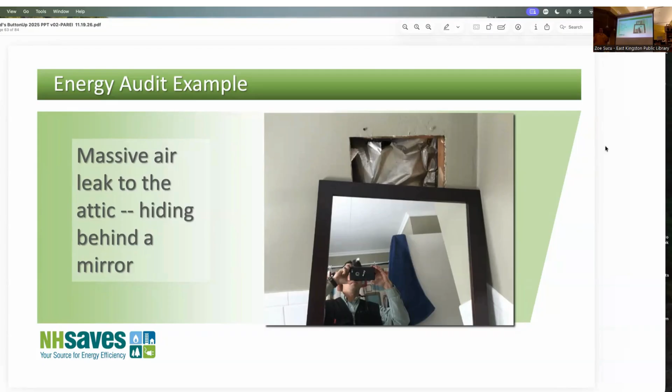The ice dams behind that section of the house were horrible because that attic was probably 60 or 65 degrees in the wintertime, because all the air was going around the mirror and into that space. Of course, when I turned my fan on, I reversed the flow there and pulled it right off the wall. That's really rare - something like that usually doesn't happen. I'm not superstitious or anything, but it didn't break, as you can see. I don't like to break people's things, so it's like...

Another thing you might see if you get an audit done is an infrared camera. In the movies, people hold up an infrared camera to a door or window and they're like, 'Oh, there's 3 bad guys in that room.' That's not how infrared cameras work at all. They're really simple - all they do is tell you the temperature of the surface you're looking at, and then it's up to you to figure out what's going on and why it's like that.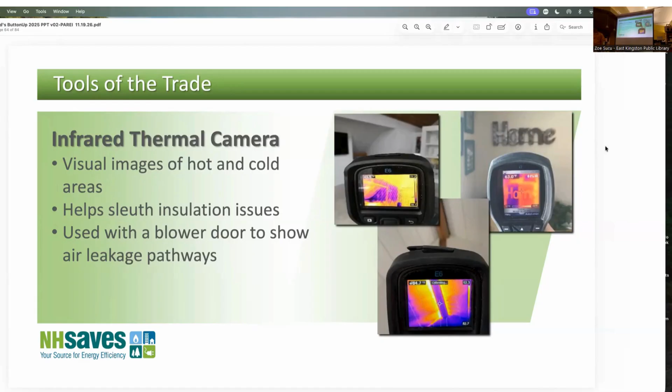As I mentioned, in an energy audit, they always test for combustion safety things. One of the big things we're looking for is carbon monoxide. If you don't know about it, it's odorless, tasteless, you have no idea it's there, but every time something burns, whether it's propane, natural gas, wood, or oil, there's a little bit of carbon monoxide. If your heating system or hot water system isn't working correctly, it can make a lot of carbon monoxide, and that can make you really sick or kill you. I don't know how many people this winter got killed by carbon monoxide, but there's a bunch.

So, long story short, definitely make sure you have a CO detector in your house, at least one. I would recommend one for every floor.

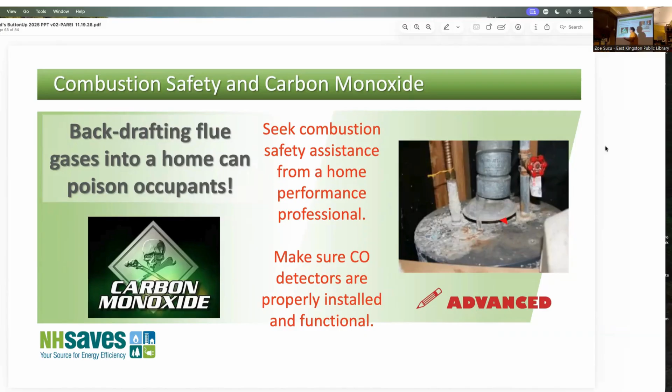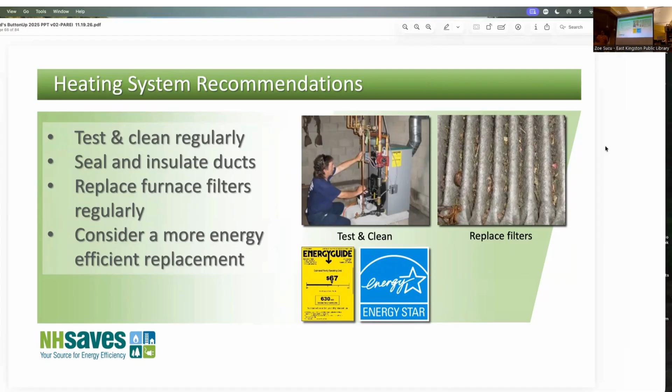Heating systems, sometimes people are like, oh yeah, that thing works great, no one's looked at it in 20 years and it's still going. You do not want to let your heating system go for that long. It should get serviced and tuned up every year, no matter what, right?

Yeah, you want to focus on the building first. Usually you want to make your house as insulated as it can be and as tight as it can be, and then you start thinking about maybe getting a better boiler or furnace or a different kind. But those are really big ticket items, they cost a lot of money. If you get a boiler that's say 88% efficient, and the one you had was 82%, well that's a little bit of a gain. But if your house is leaky as anything, it's kind of like putting water in a bucket with holes, it's sort of stupid. You want to fix the holes first, right? So it's kind of important to do all that stuff first.

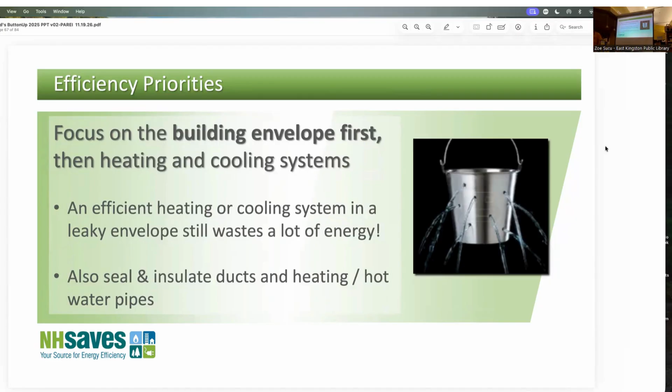All right, let's talk about some of these rebates. We're not going to spend much time on all these other ones. This one at the end here is the one I really want to focus on, so we'll just kind of fly through some of these other ones. They do have incentives for higher efficiency boilers and things like that.

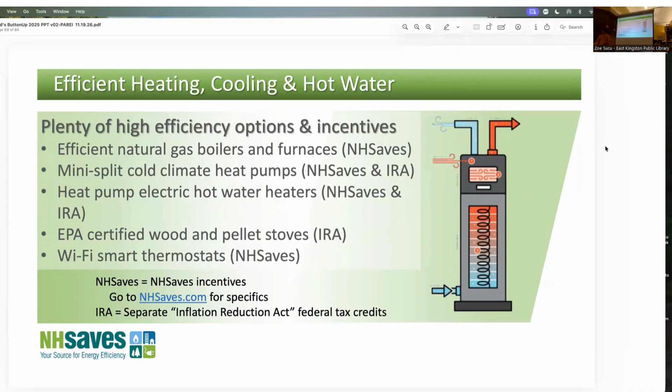You mentioned you have a heat pump in your house, you like it? The library has one. Yeah, so heat pumps are really becoming popular for good reason.

They run on electricity, which for some people is kind of scary because electricity is expensive, but they're super efficient, way more efficient than any other kind of boiler or furnace you can get. They work really well, they even work down to like -20. This one happens to be like the ductless one, where you have a little thing on the wall. This one looks like it's probably integrated into the duct system.

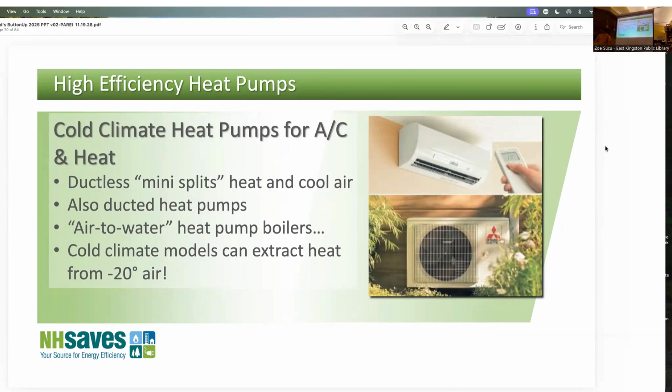One good thing about having electric heat is that if your neighbor has propane or oil and they want to get a heat pump put in, their rebate is, where is it, right here, $250 per ton. So the average house might be like a 3-ton system, so you'd get a $750 rebate. But if you got a 3-ton heat pump, you would get $1,250 per ton, so your rebate would be $3,750 for the same thing that your neighbor got, and your neighbor got a lot less, just because you have electric heat.

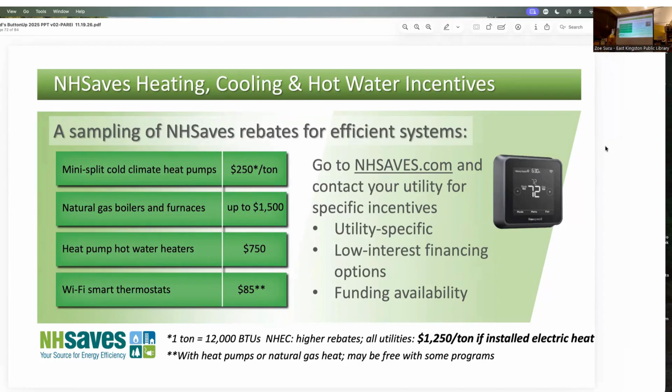Because the utilities in this program are really trying to go after electric savings, they sweeten the pot for people who have electric heat or a heat pump. So that's definitely something I would look into.

The other good thing about getting a heat pump is that it not only makes heat but also makes air conditioning. So if you're gonna put a bunch of money into a boiler or a furnace, all you're gonna get is heat in the winter. You still have to have something in the summer for air conditioning if you want it, whereas a heat pump kind of does both.

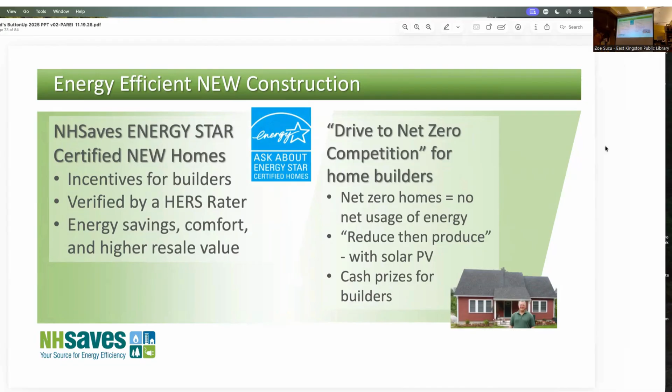That's new construction. Anyway, we're gonna go to this one. This one's called the Home Energy Performance Program, or HEP. This is for houses that are not new houses—existing houses.

Basically, you have to qualify to get into it, not by being poor or rich, or a nice person or a bad person. All you have to do is provide the size of your house and how much you use to heat it, and that's how you get in. It's kind of like trying to figure out which houses are using the most energy.

You get on their website, which I'll show you in a second. If you get into the program, then your audit ends up being free—that's about $300 to $500 of value for free. But the best thing is that if you're going to get insulation and everything done in your house, they'll pay for 75% of it, all the way up to $6,000. So it's a really neat program, really good. They also have some low interest financing for the part you'd have to pay, which is really cool.

So you go to the website. What I tell people to do is just go to Google, because you can find it by going through NHSaves, but it's really clunky and takes forever. I would just go to Google and type in NHSaves test your home, and you'll probably get a page like this.

I went on to try to see if we qualify, and they were requiring that you have programmable thermostats in your house. I have four heat sources, but I think there must be either a mistake on there, or maybe you misread it. There wouldn't be a requirement like that—they might say they want to put one in your house. Is that through Unitil? I'd have to look at it. That doesn't sound right, but I'll take a look.

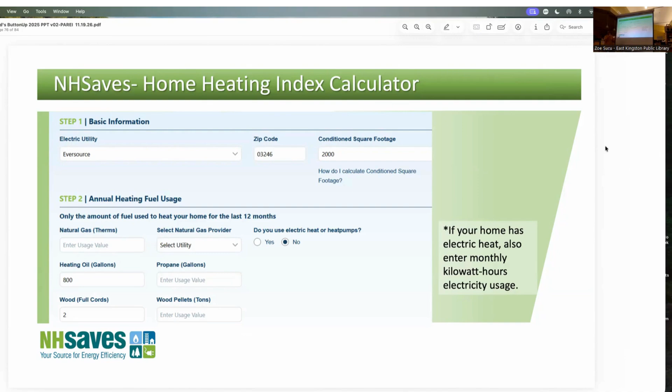So you put it all in there, hit go, and it's going to calculate what's called your HHI, your home heating index. If you're kind of efficient, it'll be down here. If your house is pretty inefficient, it should be way up here somewhere.

In the old days, no matter where you lived in New Hampshire, an 8 was the cutoff. If you have an 8 or above, you're in the program. If you're less than 8, sorry, it looks like your house is pretty good.

Unfortunately, these days, for whatever reason, in the last couple of years, all the different utilities have started doing their own thing. They still call it NHSaves, which to me implies it's a consistent, uniform program, but unfortunately, it's not anymore.

So if you're Eversource, you have to get at least a 6. If you're Liberty Electric, you've got to get all the way up to 10. If you're NHEC, you only have to have a 4. Unitil is 8. If your utility is gas, it's 9, a little bit higher. So it kind of depends on who your utility is, which is kind of a bummer, but that's the way it is right now.

The thing about these numbers too is they change sometimes. I had a couple customers recently who tried to get in like 2 years ago and they didn't qualify. But now we'll try again, because Eversource, it used to be 8 or 9, and now they dropped it to 6. So that same house might actually get in now, but it didn't get in 2 years ago. This winter was also way colder than the winter we had 2 years ago, so it depends on your usage too.

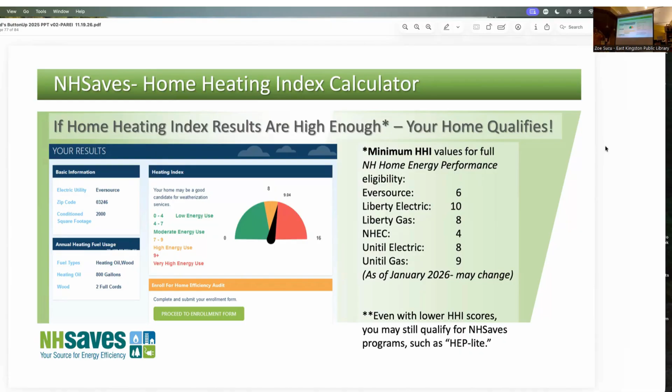So you get in, you get an audit done, and then out of that audit, you get a report. It's a big, long, like 10-page report, but one of the pages you'll get is sort of like the contract page, I guess you'd call it. It lists all the different things the energy auditor said should be done.

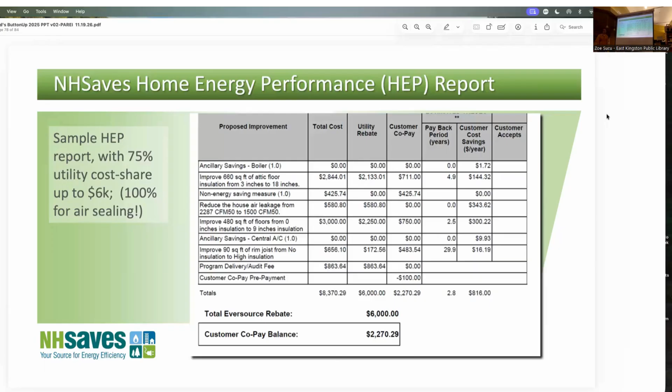When I first got into this, I thought it was a little suspicious that the auditor who did the initial assessment works for the same company that does the work. It seemed like there was a little room there for some funny business. But now that I've been doing it for a long time, there's a lot of eyes on the project—if we said we're going to do 660 square feet and put in 18 inches, it has to be that. You can't mess around, you can't overcharge, you can't do funny things like that.

What else can I tell you? Oh, there's also a program for low-income folks. In this program, it does depend on how much money you make. You could contact the CAP agency, or you can dial 211 to get information about that, or the fuel assistance program if you're in that program.

In this situation, they actually pay 100% of the work sometimes, not just 75%. But the catch is you have to qualify by having certain income guidelines. And in some parts of New Hampshire, there's actually a waiting list for this program, which is sad because those are the people who need it most, and demand is higher than they're able to handle. But it's the same kind of work we talked about—air sealing, insulation. They even do things like upgrading boilers and furnaces, sometimes even windows.

There's also—I don't have a slide for it because it's new—you guys are Unitil, but Eversource has this new program called the Moderate Income Program, that's this little card here. If you know anyone in Eversource territory, the Moderate Income Program is a new thing they started, and instead of paying 75%, they pay 100%. I don't know a whole lot about this program, we haven't done any work in it, but this one is income dependent. It says here, like, number of households—if you have 4 people in your house, you have to make less than 133,000 to get into this program. So there's an income part to this program, but the one I just told you about has no income verification or anything like that. Just wanted to throw that out there in case you knew somebody.

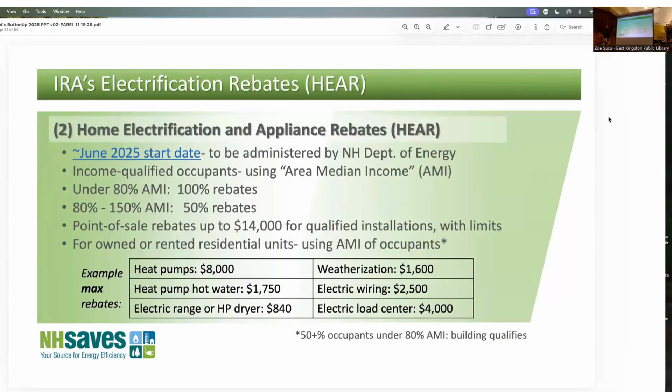Let's see, there's some other things in here about some other programs that we're going to skip through because they're not really going on. I think that just about covers it.